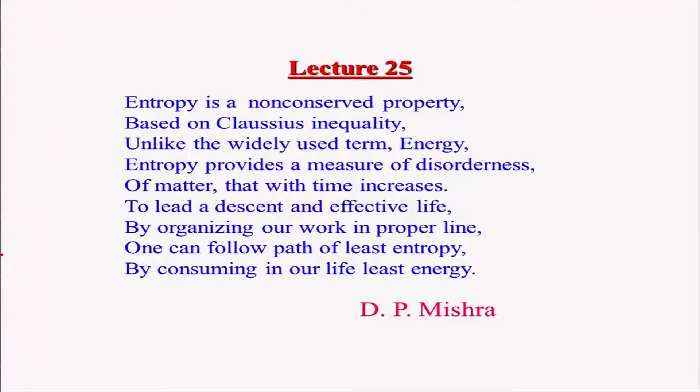So this is what we have learned from the second law of thermodynamics, and what we will do now is recapitulate certain things we have learned about entropy. We have seen that a process can take place in a certain direction, satisfying the increase of entropy principle, that is Sg greater than or equal to 0.

Of course, for a reversible process it will be equal to 0, and if it is violating the principle of entropy increase, then it will not really take place. So a process will be taking place in a particular direction, not in all the directions one could have, and that stipulates the direction of the process, or in other words, the feasibility of the process.

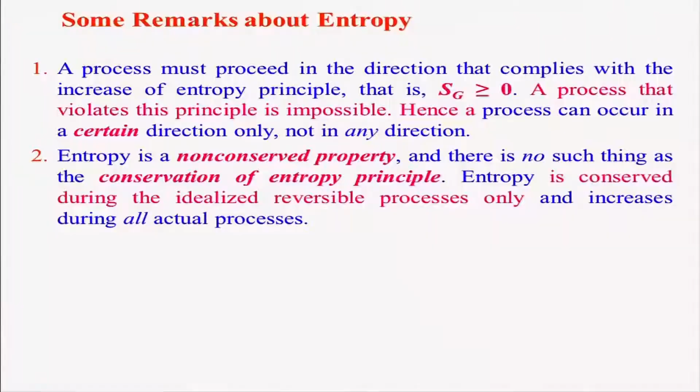As I told earlier, entropy is a non-conserved property, unlike energy. Energy is a conserved property, and according to the increase in entropy principle, entropy goes on increasing, and there is no conservation of entropy principle like there is for energy. Of course, whenever the process is reversible, which is the ideal case, entropy can be conserved. Otherwise, it goes on increasing for all real processes.

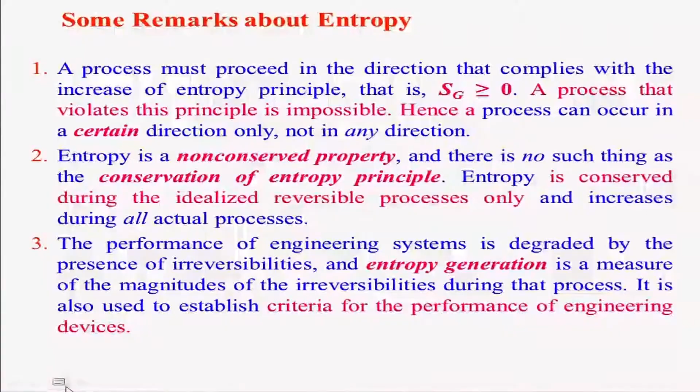We can also judge the performance of an engineering system, how good or how bad it is, and identify the irreversibility. Once we identify the irreversibility, we try to reduce it so that entropy generation can be minimized. Entropy generation is basically a measure of the magnitude of irreversibility in a process or system, and it establishes the criteria for the performance of engineering devices.

As we go along, we will find out various criteria to judge the extent of irreversibility. We will do that, but before that, let us dwell into some applications of the entropy concept we learned in the last lecture.

One way is to talk about a process diagram. Say we are having a PV diagram, we can convert it into a TS diagram and so on. It will be helpful for visualizing the process. We know that ds is basically dq by T for a reversible process.

From this I can write down dq. dq is equal to T ds, and of course this is meant for the reversible process. Then we can write this down, and if it is for a cyclic process, we can integrate it over here.

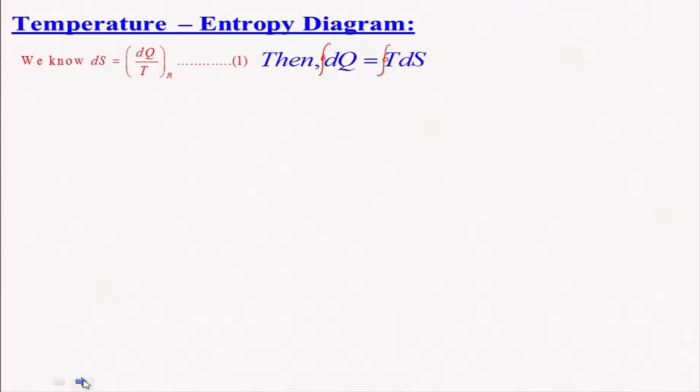And if it is cyclic, we can say that it can be integrated, say from station 1 to station 2, and this strip is nothing but T dS, which is equal to dq, and this is of course meant for the internally reversible process. That means the system will be reversible, the surroundings may not. So that area, the total area, can give me how much heat, because this is temperature versus entropy. If I integrate, I will get how much heat interaction is taking place during this process. This area will give me that, and that indicates the integration.

According to the first law of thermodynamics, for a control mass system, considering no kinetic energy change and no potential energy change, we know that dU is equal to dQ minus dW. For a reversible process, the work done is PdV and dQ is TdS. If I substitute these values, dW as PdV and dQ as TdS, what do we get? We get the expression dU is equal to TdS minus PdV.

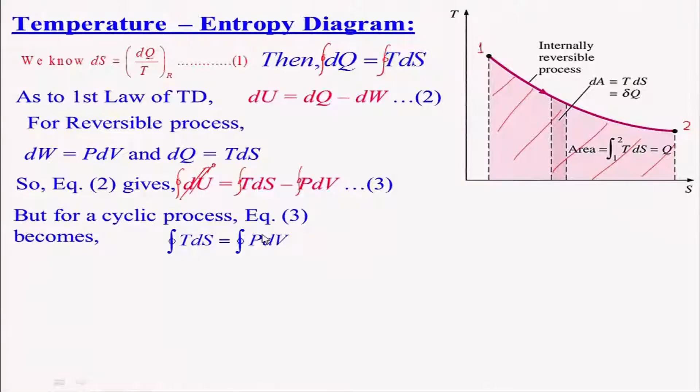If that is the case, then we will get the integral of TdS equal to the integral of PdV. We know that PdV is work done, so this process, TdS, if you look at it, will give me in a cycle the work done. The work done is basically this hatched portion, which is nothing but the integral of TdS.

And if you look at it, it is taking QH amount of heat from the source and rejecting QL amount. So this portion is the work done. For a cyclic process, as I told you, the net work done is basically the area 1, 2, 3, 4 in the TS diagram, which gives the work done.

For an isentropic process, we know that dq equals Tds. Isentropic process means adiabatic and reversible, so dq would be 0. That means ds will be equal to 0, because temperature cannot be 0.

So if I take the isentropic process between state 2 and 3, that is isentropic expansion in a Carnot cycle, S2 equals S3, entropy remaining constant, equal to SB. Similarly, for the compression process from state 4 to 1, S4 equals S1 equals SA. Now we can express Carnot efficiency in terms of the entropy diagram.

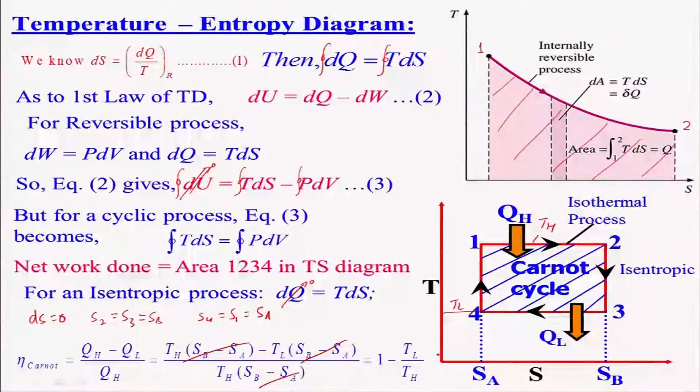The SB minus SA terms cancel out, so you get Carnot efficiency equal to 1 minus TL by TH. We have already done that before, but this is just to relook at it in terms of entropy, which is much easier than the approach considering the ideal gas, where we arrived at a similar expression.

This is a much simpler way of expressing Carnot efficiency in terms of the sink temperature and source temperature. So this is one aspect of how you can apply the concept of entropy for constructing not only the process diagram, but also for understanding the process and deriving the expression for Carnot efficiency and other things as well.

Let us look at the TdS diagram relationship. We already know that for the control mass, the first law of thermodynamics is basically dq minus du equals dw. We have also derived the expression TdS equals du plus Pdv.

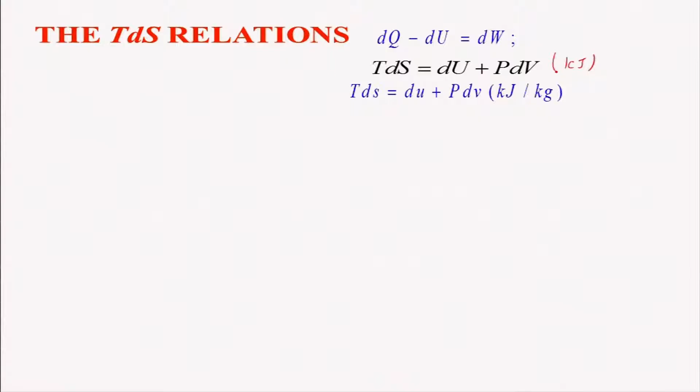On a per unit mass basis, TdS, the specific entropy, equals du plus Pdv, with units of kilojoule per kg. This expression is known as the first Gibbs equation. We can also derive another Gibbs equation by considering the enthalpy.

Enthalpy is nothing but U plus PV. If you differentiate that, you get dH equals dU plus Pdv plus Vdp. And what is this dU plus Pdv? This portion, according to the first Gibbs equation, is nothing but TdS.

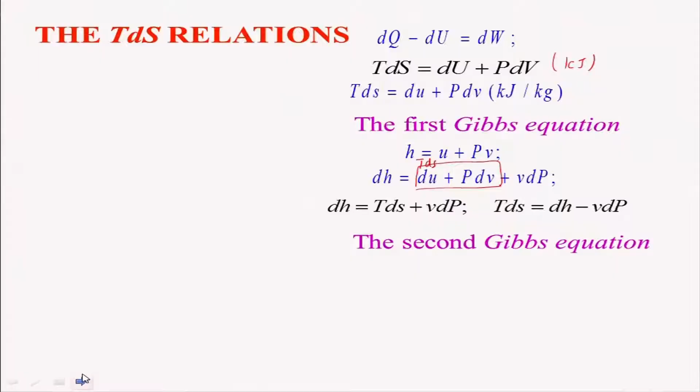So this portion is TdS. Therefore, I can express this equation as TdS equals dH minus Vdp. This is known as the second Gibbs equation, which will be very useful for finding entropy change. Keep in mind we have derived this considering the control mass system, however it will be valid for both the closed system and an open system. This expression will be valid.

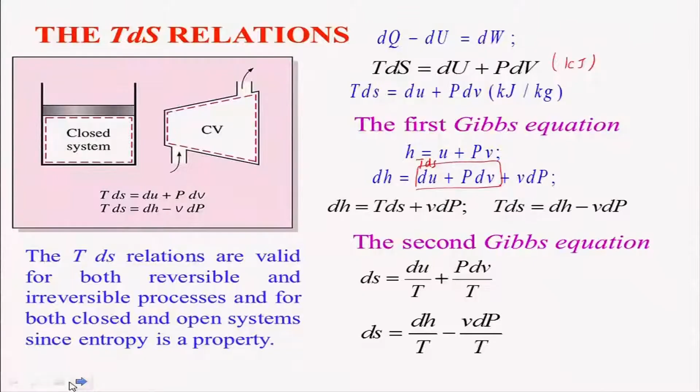This process will be valid for both reversible and irreversible processes. Although we have assumed a reversible process in deriving this, it can still be valid.

If I divide this second Gibbs equation by T, I get dS equals dH by T minus Vdp by T. Similarly, if I divide the first Gibbs equation, I get dS equals dU by T plus Pdv by T.

So for an ideal gas I can write Cv dT by T plus, using the ideal gas law, R by V into dV. If I integrate it, what do I get? I get dS equals Cv ln(T2/T1) plus R ln(V2/V1).

We have already done this for an ideal gas. This is valid for ideal gas. Otherwise also you can integrate, provided you know Cv as a function of temperature. Of course for ideal gas and some other things, in this case we have assumed Cv is constant, not a function of temperature, therefore we have taken it out and integrated.

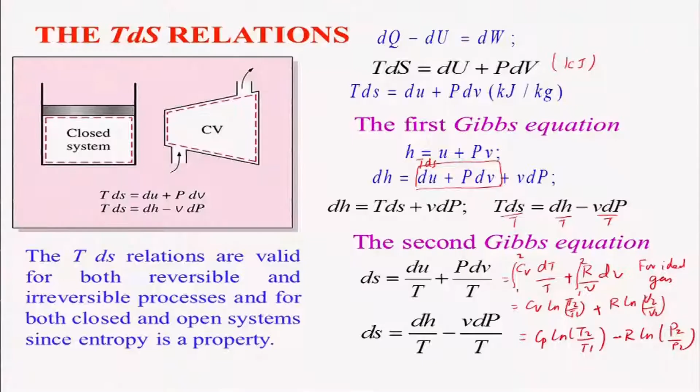Similarly, you can derive an expression like dS equals Cp ln(T2/T1), for an ideal gas, minus R ln(P2/P1). So that one can derive and get an expression, and from this one can easily apply this relationship and find it out.

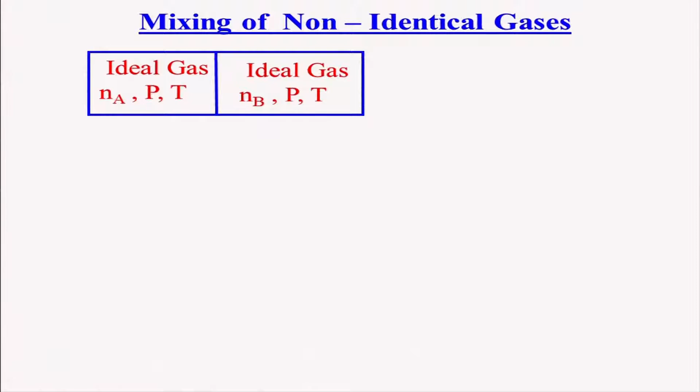Now we will take another example: how we calculate the mixing of non-identical gases. We take an ideal gas, nA moles of gas at pressure P and T kept in one chamber, and another chamber containing nB moles of gas at the same pressure, and then we remove this partition. If we remove this partition, what happens? The gas will mix, and when it mixes, there will be a change in entropy, and that is an irreversible process.

Now how do we calculate that? Entropy change for an irreversible process, because mixing is an irreversible process -- you cannot really reverse it back. So one can actually substitute this process in terms of a reversible process.

One can think of gas A undergoing a reversible isothermal expansion process, and after that it comes to pressure PA, the partial pressure, and then passes through a semi-permeable membrane, which is also reversible, forcing the gas. Similarly, gas B undergoes a reversible isothermal expansion, and then is forced through a semi-permeable membrane. So both will be mixed in this chamber, which is at partial pressures A and B, and the total pressure will be P.

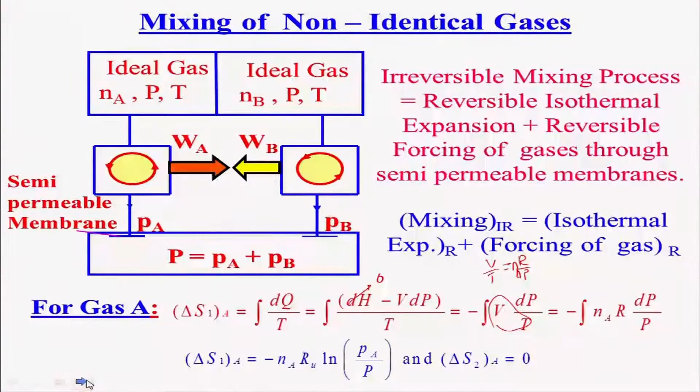A similar expression we will get for gas B. We get delta S_B is equal to minus N_B R_u dP by P. When you integrate this, you get delta S_1B equal to minus N_B R_u ln(P_B/P), and delta S_2 for gas B will also be equal to 0.

We know that partial pressure is basically equal to the mole fraction, which is N_A by N, where N is the total mixture, N equals N_A plus N_B. So we can express P_A as X_A times P, where X_A is the mole fraction, and similarly P_B is equal to the mole fraction of B times the pressure.

So if we add the delta S for both gas A and B for path 1, it will reach minus N_A R_u ln X_A minus N_B R_u ln X_B.

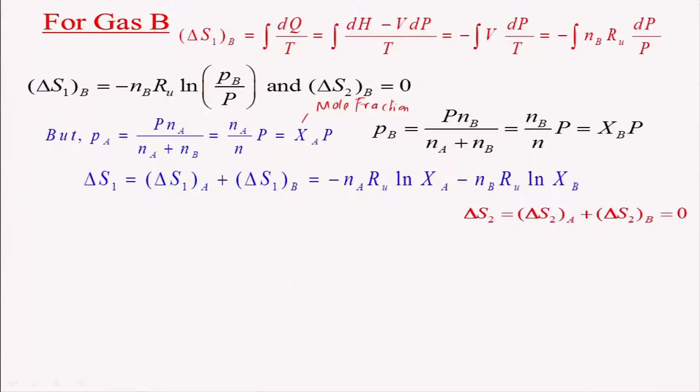We know that delta S_2 for the second process, forcing the gas reversibly through the semi-permeable membrane, is equal to 0. So therefore the total entropy change during this mixing of gases will be equal to minus N_A R_u ln X_A minus N_B R_u ln X_B.

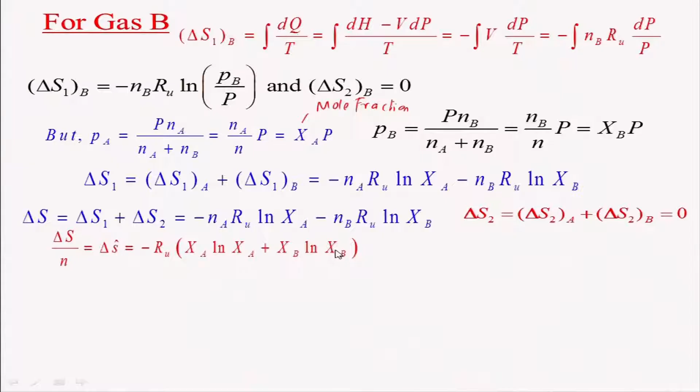And per unit mole you can express it in a similar manner, that is equal to minus R_u times X_A ln X_A plus X_B ln X_B, in the bracket.

For a mixture we have taken two gases, but it might be n gases, n number of gases one can think of. So the total entropy change, the change in entropy, small s, is equal to minus R_u times sum of X_i ln X_i over the number of gases, whatever it will be. It may be 2 gases, 5 gases, 10 gases.

So you can find out the entropy change for a mixture of gases during mixing, which is an irreversible process. We have found it out using a reversible way. If you look at that way, X_i is less than 1, so therefore entropy is always a positive quantity, because X_i is less than 1. So it also says that it adheres to the principle of entropy increase.

We have discussed a lot about entropy, but a question might be lurking in your mind: what is the physical meaning of entropy? We are using it, we know how to calculate it during a process, it tells us about the quality of energy, and it talks about the feasibility of a process. So, what is the physical meaning of that?

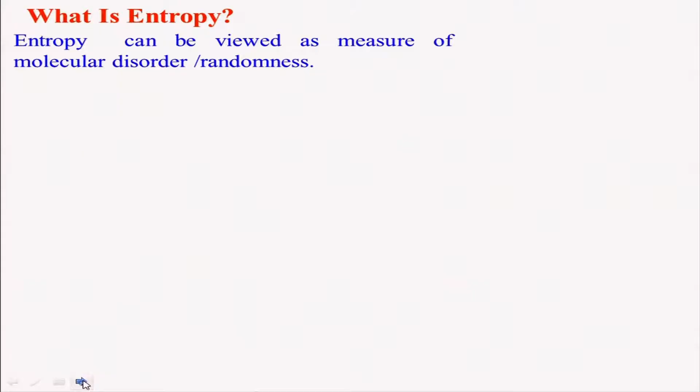The simple definition itself tells you that in the solid case, the molecules are in very close contact and vibrate around their own positions without really changing position. Therefore, the entropy will be very, very small. The liquid is a little movable, it moves together but it moves, and therefore liquid entropy is higher, and gaseous entropy is the highest among all three states of matter.

I had given an example earlier: in earlier days our bond in the family was very strong, therefore we had less entropy. That means the stress level in life was very small, because stress was being shared and taken care of by others. Later on, the family degenerated in our country, and we became like a liquid state, entropy increases, and today we are in a gaseous state. So we are facing a lot of problems in life because we are moving at a faster rate, and therefore the efficiency is coming down and entropy is increasing.

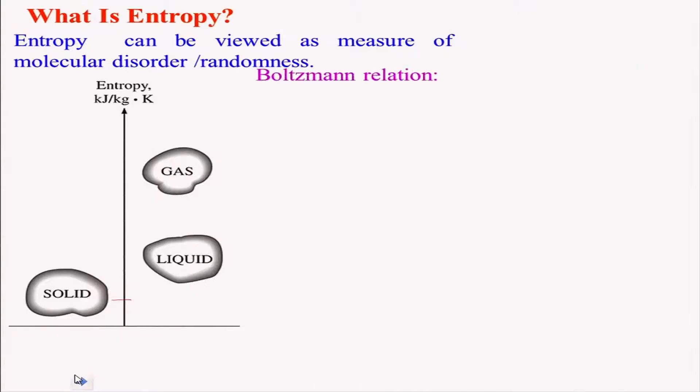If you look at it from the statistical point of view, we can express entropy using the Boltzmann relationship: S equals K ln W. K is the Boltzmann constant and W is the thermodynamic probability, representing the extent of randomness available.

If you consider the matter, this will be dependent on the temperature at which you take a solid. At a higher temperature, the entropy will be higher. If you take a pure crystal, you will find that the entropy will be 0 only when the temperature is 0. If the temperature is different, it cannot be 0, it will be some finite value.

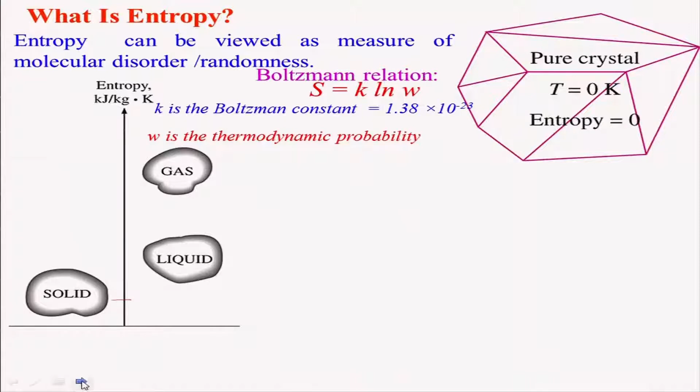This basically is the third law of thermodynamics: a pure crystalline substance at absolute zero temperature is in perfect order, and therefore its entropy is 0. That is nothing but the third law of thermodynamics.

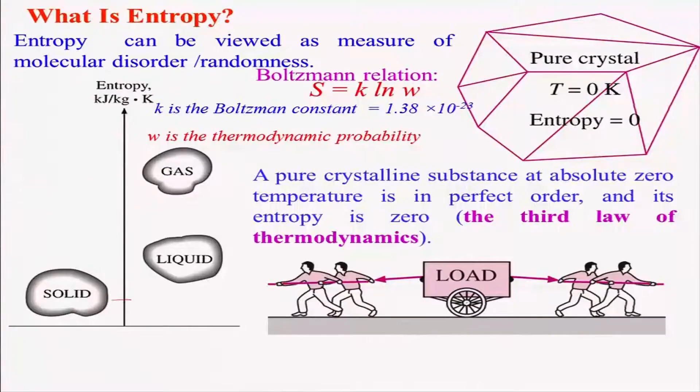Just to illustrate the physical meaning of entropy: let us consider a load in a cart, being pulled by a few people on the left hand side and pulled on the right hand side. Will it really move, or will it just vibrate, moving here and there? If you look at it, it will basically be in random order.

A similar situation occurs in our case too, like if you consider going to our Kalyanpur crossing, everybody wants to go, but as a result nobody can manage to go, resulting in a traffic jam. There might be several examples like this where we encounter entropy.

I'll give another example: suppose before an examination you study a lot, and then when you go to the exam hall, you get a blackout. Suppose you can't do something, then you cannot retrieve the information from your memory, because it is not orderly placed.

Another example: suppose in your room you have kept books, or you are in a library, if the books are kept randomly, it is very difficult to locate a book. That means the entropy of that library or room is very high. So higher the entropy, the more difficult it is to handle, and disorganized energy does not create much useful effect, although we may be using it.

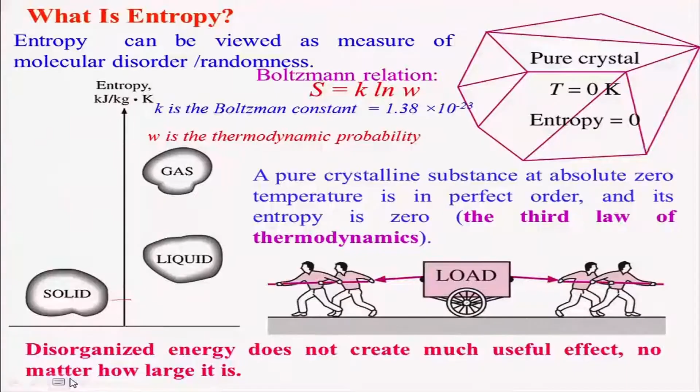So therefore, one has to take entropy into consideration and minimize the entropy by organizing ourselves. That is why when I compare when I was in your place, we used to work less, while you people are all the time busy, working harder than what I could think. But if you look at the net effect, it is not that effective, and on average, people are not that effective. So to be effective, one has to organize oneself, which means you will have to minimize the entropy in life.

So till now, what we have done is basically looked at how to handle the control mass system, or the closed system. But we also need to handle the flow system, where flow mass will be entering and leaving, and there will be some interaction kind of things, and we need to handle that.

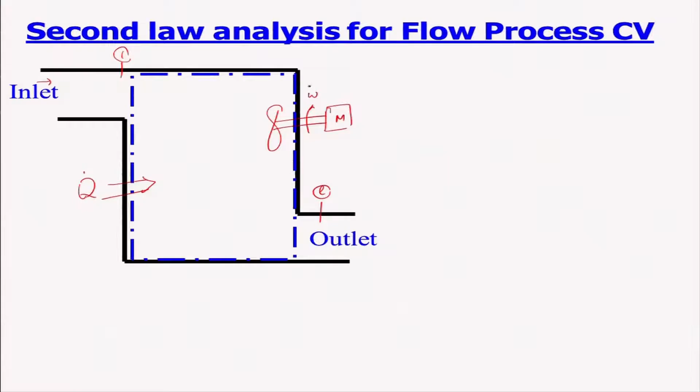We will do this in a similar way. Let us consider a flow system here, where some mass is entering, this is my inlet and this is my exit. There is some shaft work going on, and there is some heat interaction also. Let us say some heat is entering here, and as a result there will be some entropy change, entropy generation will be there.

Now this dashed line I call a CV, control volume. But we have not derived anything till now, the expression for the entropy change, which we have seen, delta S equals dq by T plus Sg, entropy generation, that we have seen.

Now that is applied only for the control mass system, but here we have a problem where the flow is entering and leaving, mass is entering and leaving. If this is mass in and this is mass out, exit, then how will we do that? We will do it in a similar manner to how we handle the first law of thermodynamics, that is, this flow process can be converted into a series of non-flow processes, like a video camera converting into various still images, snapshots. So we can do that.

We will consider that at time t, a certain amount of mass is entering, this is my system. Now what is the system? The red color shown here is my system at time t. And at time t plus dt, the system becomes a new system, which is having a certain mass about to leave this control volume, and at time t, the certain amount of mass shown in this A region is about to enter into the control volume.

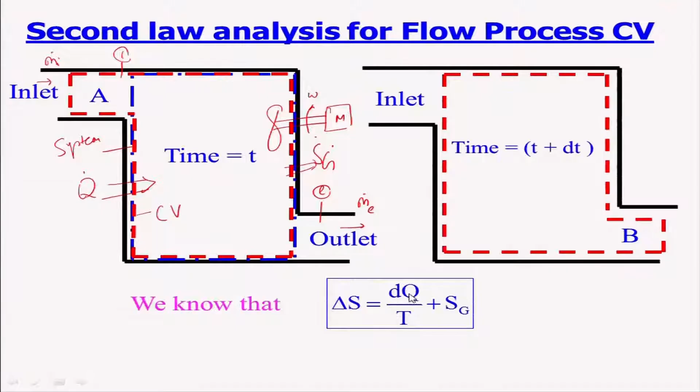Is that clear? Then what will we do? We will take this one as a system on the left hand side, and the right hand side is a system between time t and t plus dt, where dt is very small. So therefore we will apply this delta S which we have derived for the control mass, delta S equals dq by T plus Sg, where Sg is the entropy generation.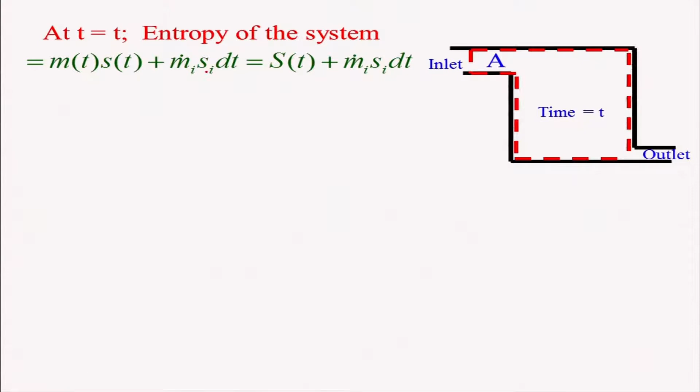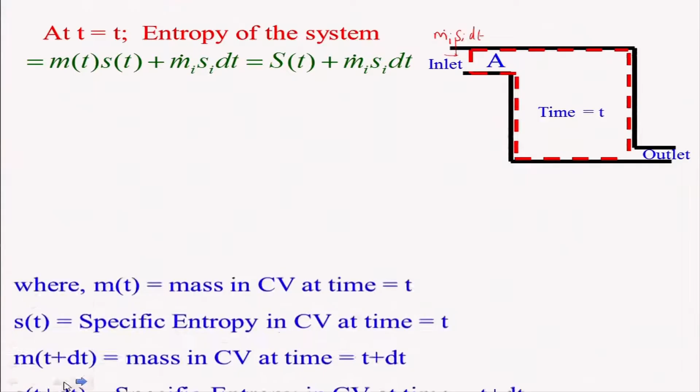So let us do that. At time t, what would the entropy of the system be? It will be the entropy whatever is there in this portion of the system, and the entropy that is entering. If you look at this, it is basically m dot I, S I, into dt, that is entering. So the total entropy at time t, plus this amount of entropy entering during time dt. Similarly, at time t plus dt, the entropy change of the system will be m at t plus dt into entropy at t plus dt, plus the amount of entropy going out, that is m dot E, S E, into dt.

So this balance we will have to do using the entropy change for a control mass system, because we have considered time t as one control mass system and time t plus dt as another control mass system.

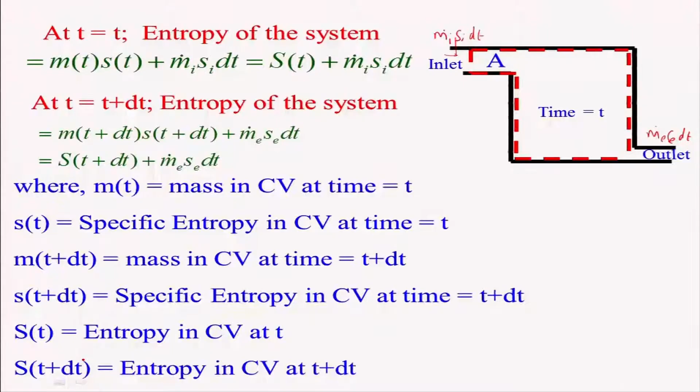We already know this expression, so what we will do is put that in. This is nothing but the change in entropy here at the exit minus the entropy at the inlet. Because this is the entropy at time t plus dt, and this is entropy at time t, the change in entropy is equal to q dot into dt divided by T, and that is nothing but an entropy generation rate during time dt, where q dot is the heat transfer rate during time dt.

Therefore, q dot into dt by T becomes dq by T, and this Sg is nothing but the entropy generation rate during time dt, integrated over dt. So you divide this by dt here and dt here, this will cancel out, and then when dt tends towards 0, we get basically an expression like this.

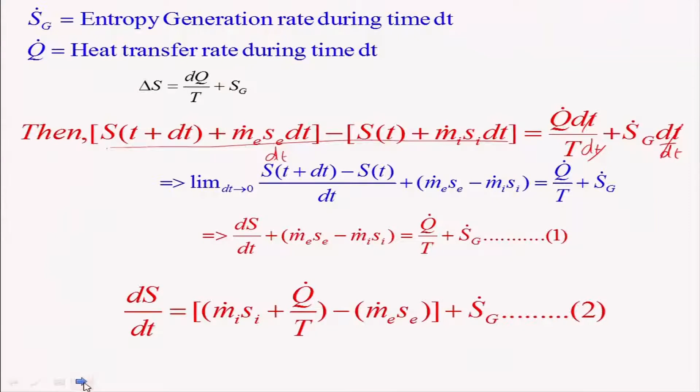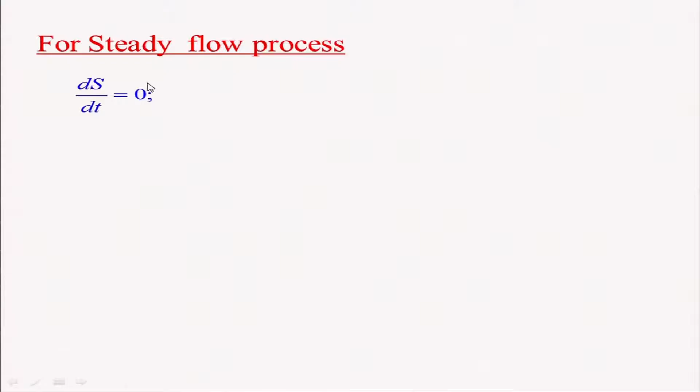For a steady flow process, what will happen is the entropy change is equal to 0. And of course, mass is conserved because in a steady state process there is no accumulation of mass. Therefore, m dot I is equal to m dot E, equal to m dot.

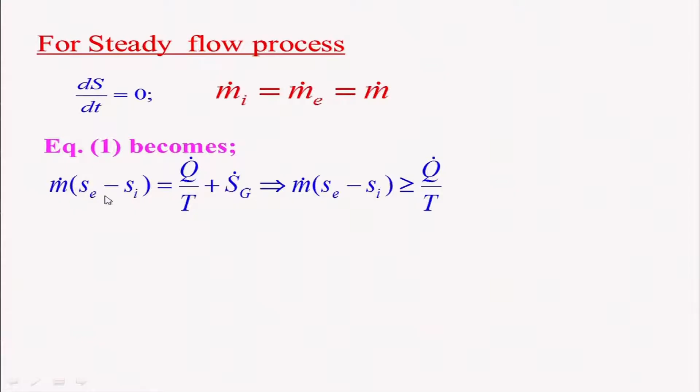And once that happens, the equation becomes the equation we derived just now: m dot into Se minus Si, that is the change in entropy between the exit and the inlet, is equal to the heat transfer rate divided by T plus Sg. That means the change in entropy will basically be greater than or equal to q dot over T.

And a similar expression we have also got for the control mass system, but the only difference is that here it is the mass flow rate involved, and this is also the heat transfer rate that is coming in. That means entropy rate is what is considered here.

And for an adiabatic process, what would it be? Q will be 0. So therefore, the change in entropy will always be greater than or equal to 0 for an adiabatic process. And for an isentropic process, that is equal to 0.

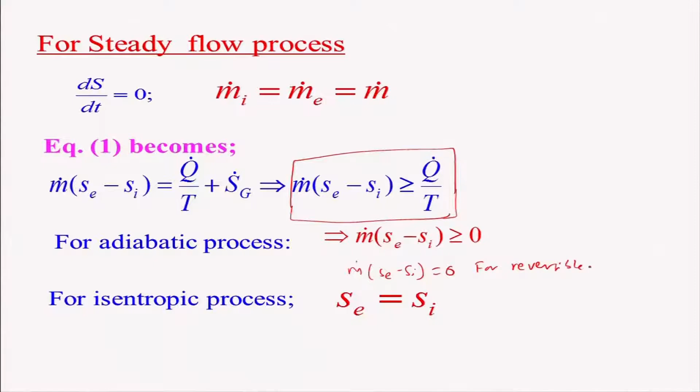Isentropic process is nothing but m into Se minus Si equal to 0, for a reversible process - reversible and adiabatic - that is nothing but isentropic. So Se is equal to Si, meaning the entropy remains the same at the exit and the inlet for an isentropic process.

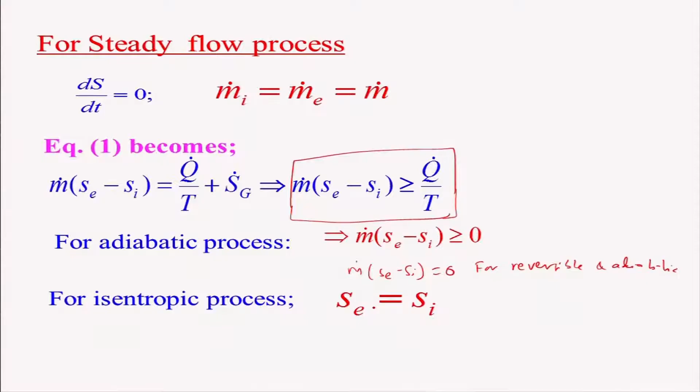And if you look at what are the applications of the second law of thermodynamics - I have already discussed that - let us summarize: it is to identify the direction of a process, meaning whether the process is feasible or not, and to determine the degradation of energy during the process, meaning what the irreversibilities are, because in irreversibility energy will be degraded.

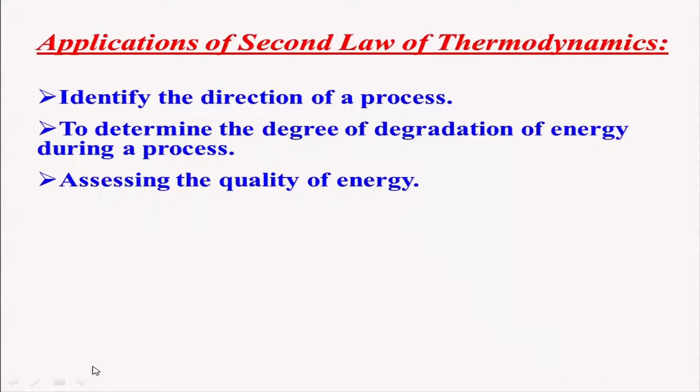One example is friction, like mixing. There are other examples where energy will be lost and you cannot really retrieve it. And assessing the quality of energy - what will happen, suppose I have a large amount of heat, but its quality is low, so I cannot really use it properly. And determining the maximum possible performance of an engineering device, because that will give us a limit, something we should strive for.

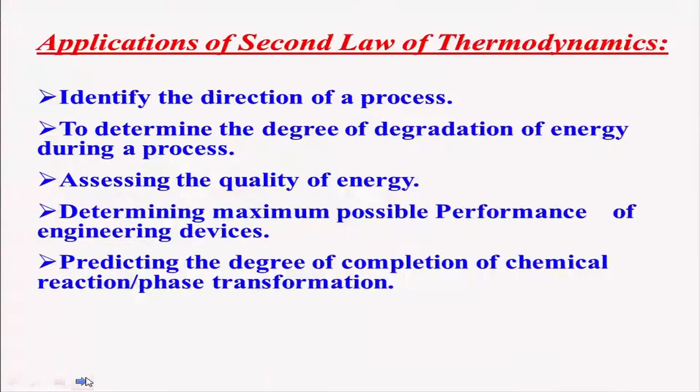Predicting the degree of completion of chemical reaction and phase transformation, we want to calculate the equilibrium product in a chemical reaction, which we can determine by applying the second law of thermodynamics, or entropy. Recall our discussion about adiabatic temperature, where we took a simple approach assuming we know the product. But in reality, you won't know the product; you'll have to calculate the equilibrium products by assuming the temperature, then calculate the adiabatic temperature, and iterate. It's quite a complex process, which we did in a simplified manner, but that's not the actual case. So it's important to look at these applications.

Let's take an example: an engineer claims to design an air flow device which takes 3 kg of air per second at 200 kilopascals and 380 Kelvin, and delivers 1.2 kg per second of hot air stream at 100 kilopascal and 500 Kelvin, and also produces 1.8 kg per second of cold air stream at 100 kilopascal and 300 Kelvin. This device does not require any additional energy as heat for its operation, and no work is produced or given to it.

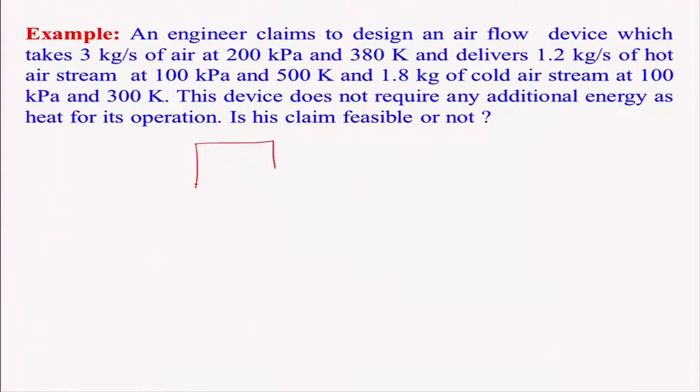Looking at this, station 1 has 3 kg per second of air entering at pressure 200 kilopascal and temperature 380 Kelvin. One stream comes out with mass 1.2 kg per second, pressure 100 kPa, and temperature 500 Kelvin - that's the hot stream. It also gives another mass of 1.8 kg per second of air, leaving at pressure 100 kPa and temperature 300 Kelvin - that's the cold stream.

So how do we go about it? How will I approach this? Basically it's simple - you'll have to do three things. This is what you call a flow system, so you can consider a control volume as the boundary of this system. First, you'll have to state the assumptions here.

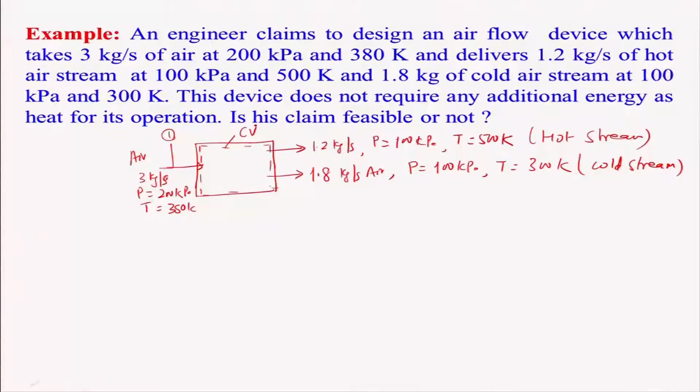What are the assumptions? It's a steady flow process - change in kinetic energy is equal to 0, and change in potential energy is equal to 0. So to find this out, you'll have to look at mass conservation, then energy conservation, and then do an entropy balance - that's the second law of thermodynamics.

Looking at mass balance: M dot 1 equals M dot 2 plus M dot 3. Is it balanced? M dot 1 is 3 kg per second, the hot stream is 1.2 kg per second, and the cold stream is 1.8 kg per second - therefore it is balanced. So the conservation of mass is satisfied, meaning it's possible so far.

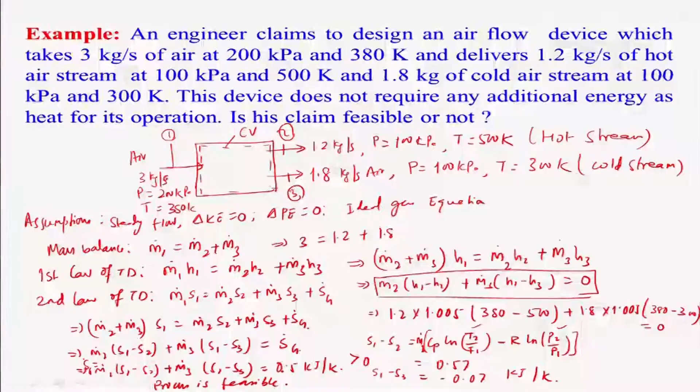We have seen that if S dot g is greater than 0, then the process is feasible. However, if it is equal to 0, then the process is reversible. But in case S dot g is less than 0, then the process is not possible at all, it is not feasible. So we have learnt here how to apply the second law of thermodynamics for a flow process, or a control volume system, you can say. Thank you very much.